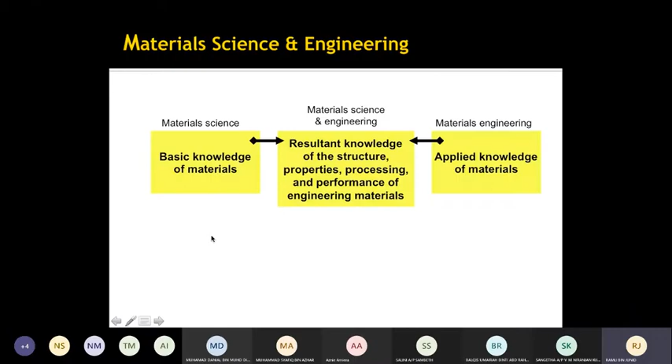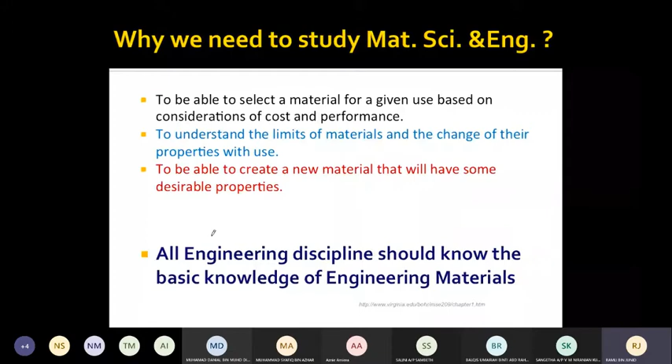So I think yesterday we are already in here. Okay, we are already in here, and I think I have explained this one yesterday. And this is why material science and engineering is important.

First, because we want to ensure the performance. The performance is justified with the cost. For example, if you want to make a car, the car must have a certain period of time, how long it can last. The requirement.

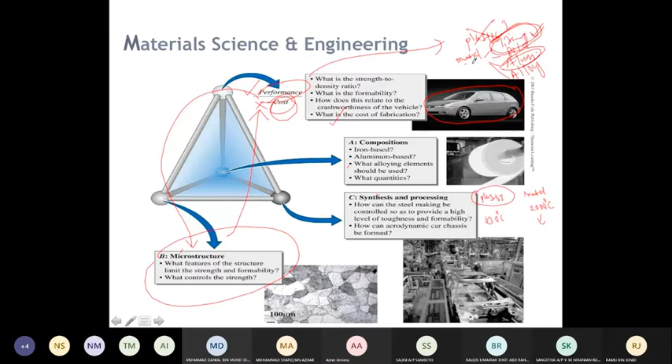Okay, engineering materials can be classified into several types. First is metal and alloy. Metal is metal. In Malay we call it besi. Alloy is a mix, the mix of besi, mix of metal.

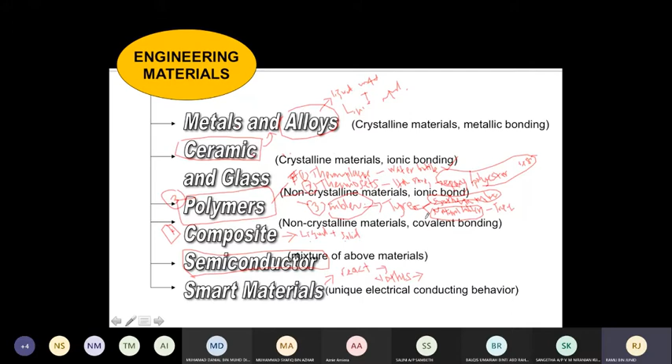So the amorphous refers to the arrangement of atoms randomly. So the atoms are arranged randomly, very chaos lah. No specific order in terms of the arrangement of the atoms. However, crystal has an order. The arrangement of the atoms is in order. Faham tak? In order means in a good way lah. Organized. This one disorganized. Arrangement of atoms disorganized. This one is organized. If you have any question, you ask. If you don't understand, you ask.

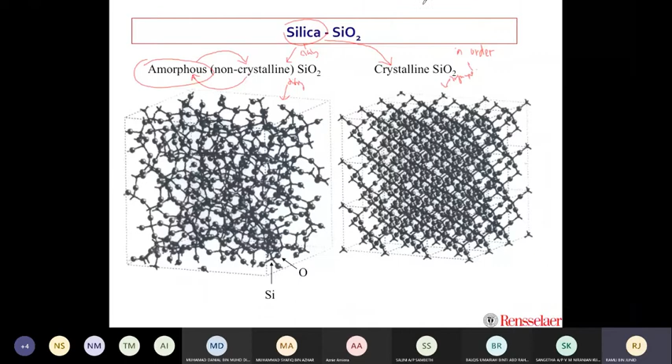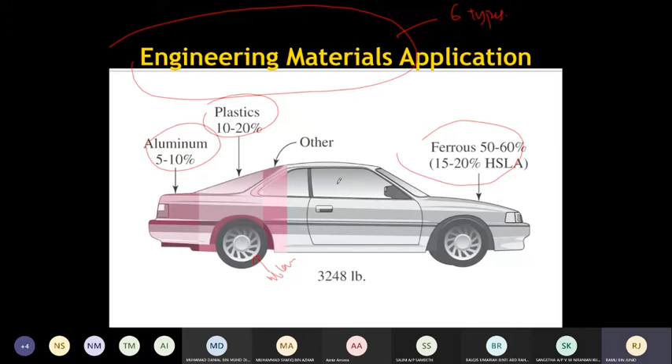Okay, we go to the first engineering material. First is metal and alloy. So the definition of metal and alloy: it is an inorganic substance which is composed of one or two metallic elements. So as I said, this alloy is a combination of one metal plus one metal. Okay, and it may also contain small concentrations of non-metallic elements. Non-metallic elements, for example, carbon, nitrogen, oxygen. Typically, this one lah, metallic element.

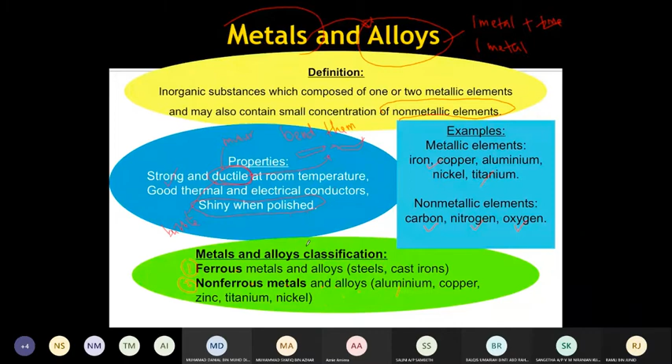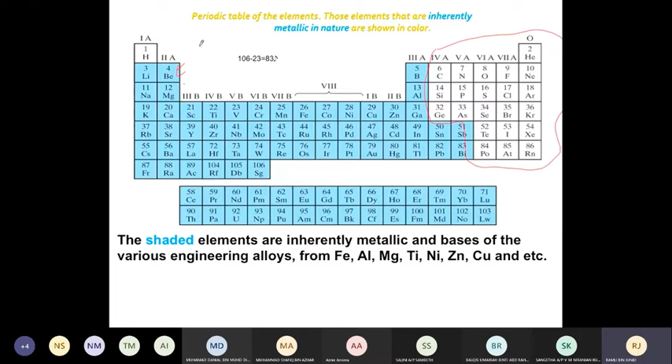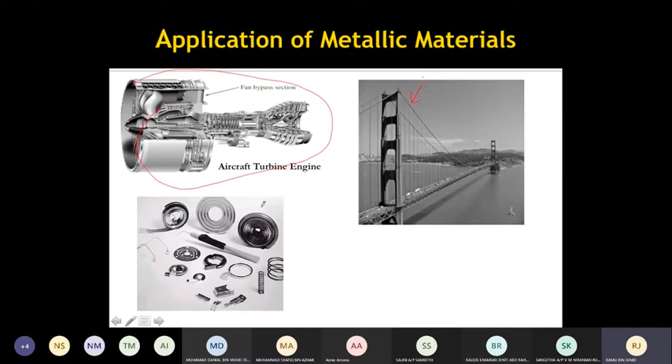Application of metal elements. First, to make bridges. This is the Golden Gate Bridge in California, United States. This is an aircraft turbine engine and other smaller things that can be made using metal.

Okay, we go to ceramic. Ceramic is an inorganic substance consisting of metallic and non-metal elements, chemically bonded. For example, titanium oxide. So titanium is a metal element, oxide is a non-metal element. This combination will produce a high strength material. So this is advanced ceramic lah, a very high strength material, and it can be used as a cutting tool, typically to cut metal.

Okay, the properties are high hardness, high temperature strength, a little like, you know, porcelain. Porcelain plate. So it's very brittle, lightweight, high strength. All positive properties. Okay, lightweight, brittle, high strength, strong, something like that. Ceramic. This is the metal and non-metal.

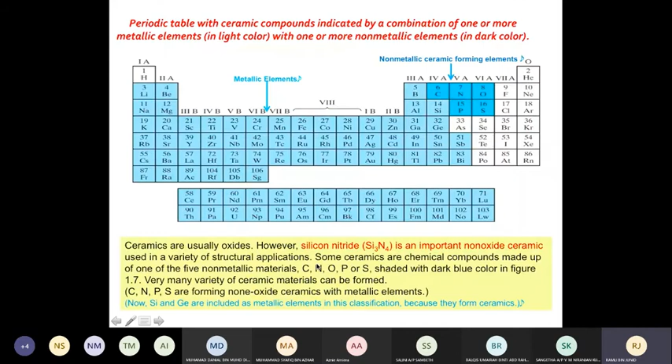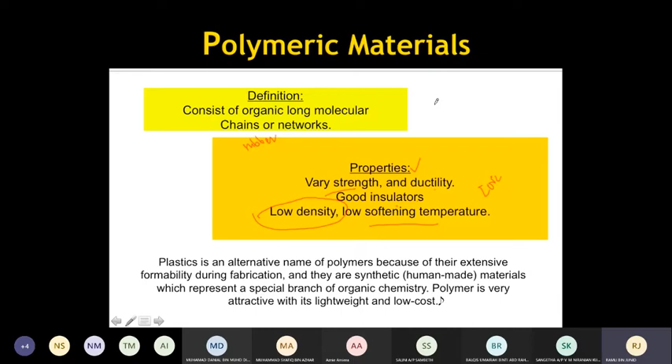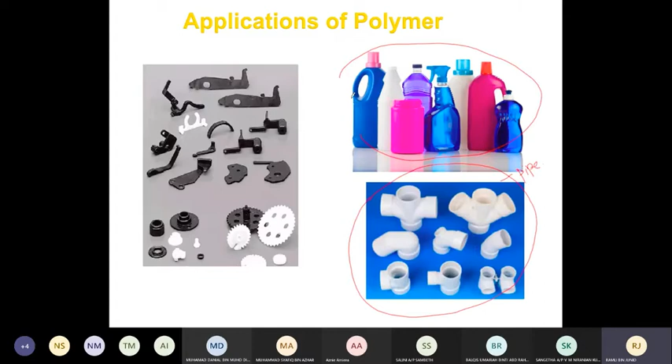Okay, this is the application of polymer: to make bottles, to make joining pipes, or pipes also can be made using polymer, and other simple things like these.

Okay, composite: material made up of two or more distinct materials, matrix and reinforcement. Example, concrete. So you want to make a building. The building should have a pillar. Inside this pillar, before you pour cement, you put a steel bar, or we call it rebar, reinforcement bar. Then you pour cement, so it will become concrete.

So that cement is holding the steel bar. That is why concrete is very strong, because inside there is a steel bar. But the steel bar alone cannot take the load if it stands alone. So you have to combine it with cement to become concrete. Faham tak? Other types of composite include polymer matrix composite, metal matrix composite, and this one is ceramic matrix composite.

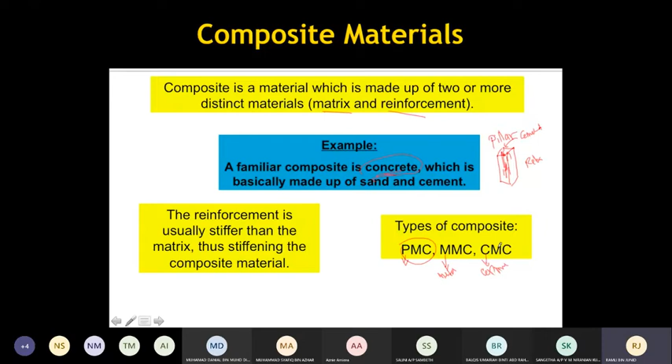Okay, application of composite material. First is to make a boat or yacht. And you can use it to make this one, a bicycle frame, because it is high strength and it is lightweight. And then a rotor blade, no, not rotor blade, helicopter blade.

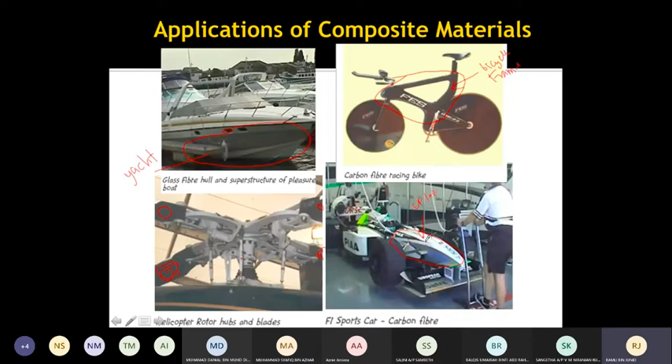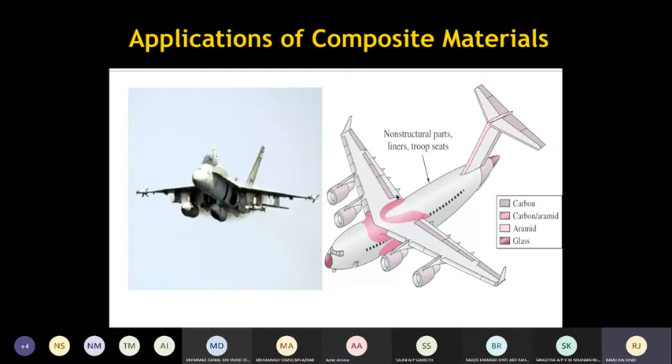This one, the so-called hub, it can be made using composite. And then also the body of the racing car, carbon fiber plus epoxy. So this is composite. It is high strength. And another application is, what is it called? Aerospace. And then electronic materials.

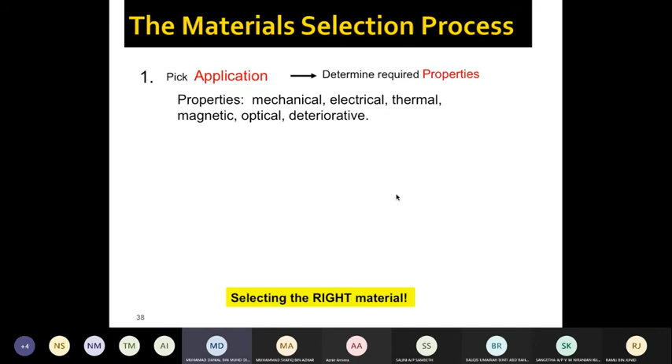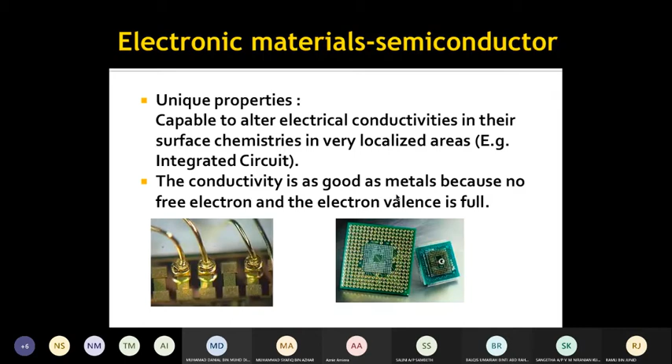You can hear your voice clearly. What's your question? We can't hear your voice clearly just now. My voice. I think my voice is already at maximum. My speaker is already at maximum. I mean, the connection is poor. Oh, okay. If I change this, I will be disconnected. So better I don't change. Understand? I will be disconnected. So we try to cope. This one is not that important.

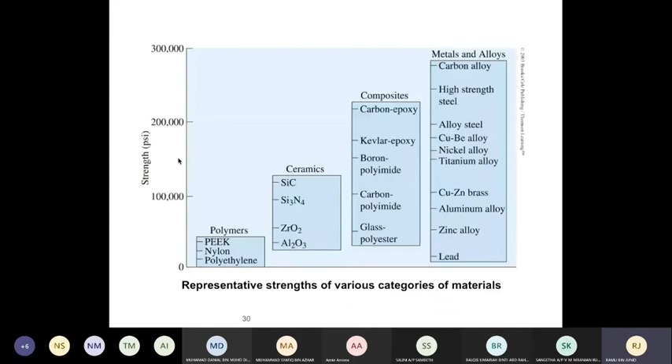So if you want to remember what smart material is, you can just say that smart material is the material that will respond according to its environment. So what environment? If you give stress or a physical environment change, the material will change. I can show you an example. You can see my YouTube right now? Can you see my YouTube? Yes. Okay. This is an example of smart material.

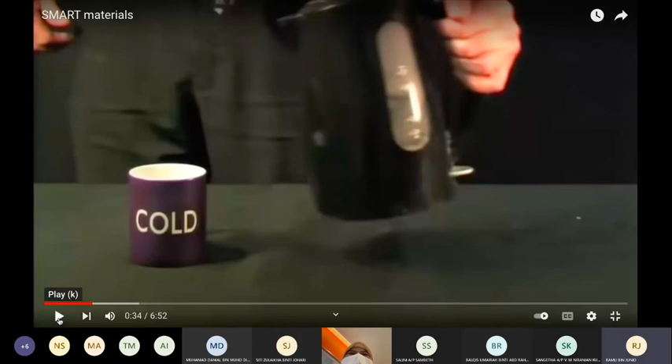Okay. This is a cup or mug. So now it is cold, but when you pour hot water into the mug, the mug color will change. So that is an example of smart material. It changes because of the heat. And this one is the clothes. This t-shirt also will change its color when it is exposed to heat. So this guy gives hot air from the hair dryer to the t-shirt, and the t-shirt will change its color.

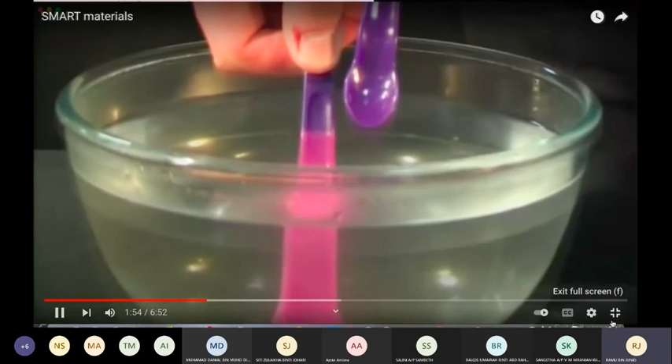Okay, this film also detects human body parts because we have blood in our body. It detects the blood because the blood has some temperature, so that's why it changed. Same with this spoon. When it touches water, the color will change. So this is an example of a smart material. Awesome.

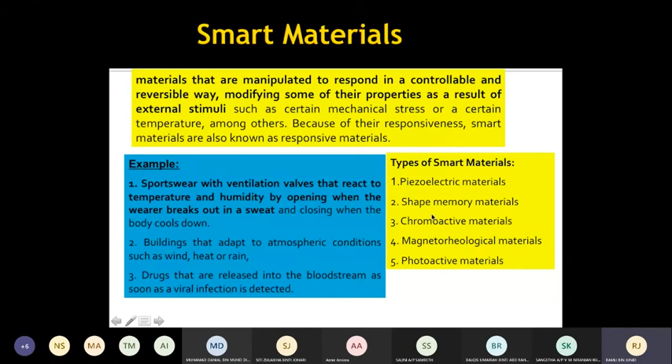Okay, and we also have shape memory alloy. Shape memory alloy is the alloy or metal that will change when it is exposed to a certain temperature. So initially the shape of the alloy could be like this, but when you put it in hot water, the shape memory alloy will become straight. We can look at an example of shape memory alloy.

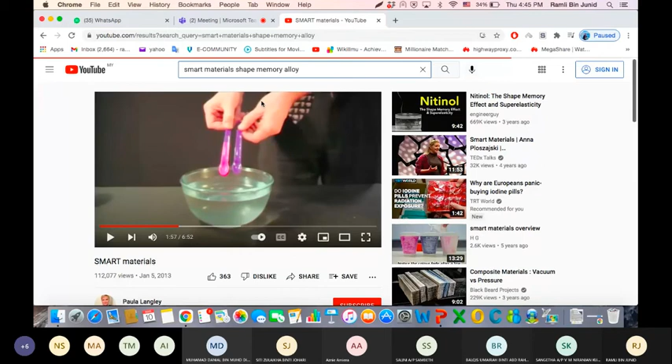Okay, this one is an easy example. So memory metal is called nitinol because it's an alloy of nickel and titanium. So what's cool about it is that you can twist it in any shape that you want. Twist it all up, and if you just stick it in warm water, whoa, it shoots right back straight.

See, with this shape memory alloy, when you bend it and then put it in the hot water, it will become straight because it changes according to the heat from the water. It does it pretty forcefully.